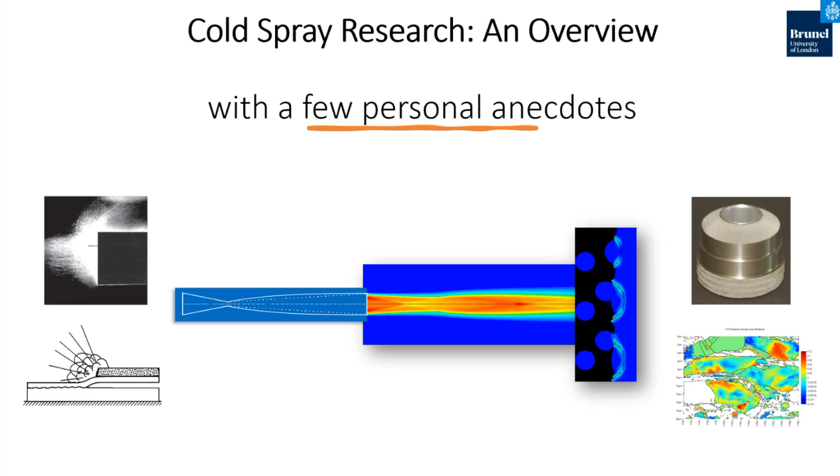Thank you very much, Prakash, for inviting me. And it's a pleasure to share my experience of working on cold spray for now 25 years. So I'm going to also point out that this is the work of not only myself, but a large group of contributors, especially those with whom I worked at Helmut Schmidt University in Germany.

So I'm not going through the entire list of contributors, but you see the names.

Cold spraying, for some of you, might be already a familiar topic, but for those of you who don't know anything about cold spray, this is basically a powder deposition method. Like any other thermal spraying method, you use powder and then you accelerate the powder particles and deposit them on a substrate to build coatings.

And that's used nowadays also for additive manufacturing. The main difference between conventional thermal processing or thermal spraying processes is that the particles of the powder remain in the solid state. So it's basically a solid state deposition process. Why? Because if you manage to decrease the processing temperature, you avoid oxidation and you avoid undesirable phase transformation. So that's the main motivation behind development of cold spray.

Interestingly, you can use cold spray to deposit refractory materials, including tantalum, with a very high melting point, which you would have trouble with if you wanted to use conventional thermal spraying methods.

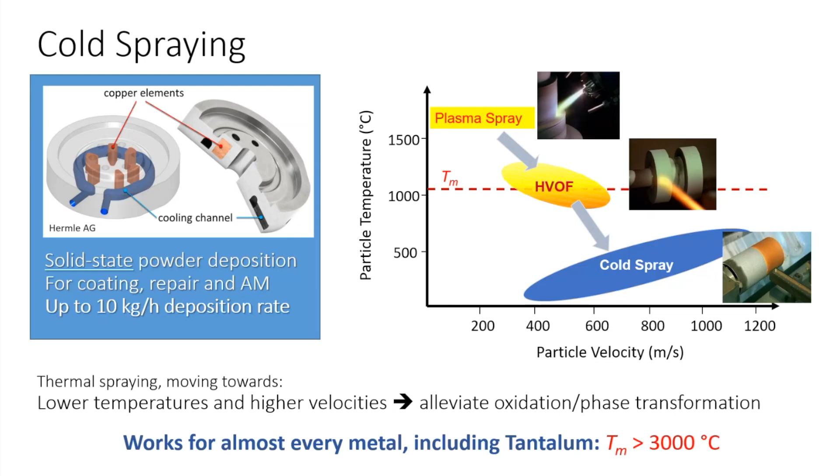So based on that, a main persistent question in cold spray research has always been: how does it work? So what's the mechanism behind that? I would say it's still maybe an open question. I would try to shed light on that a bit through the exposure to cold spray research. But I'm not going to give you probably the best answer to this question that we know so far.

So that's the answer. The cold spray mechanism is based on what you see here. I'm not going through all the details, but I can assure you that's one of the best and more balanced answers I've ever seen. The only problem is that it's been generated by AI, not me. I think I would not be able to provide an equally good answer.

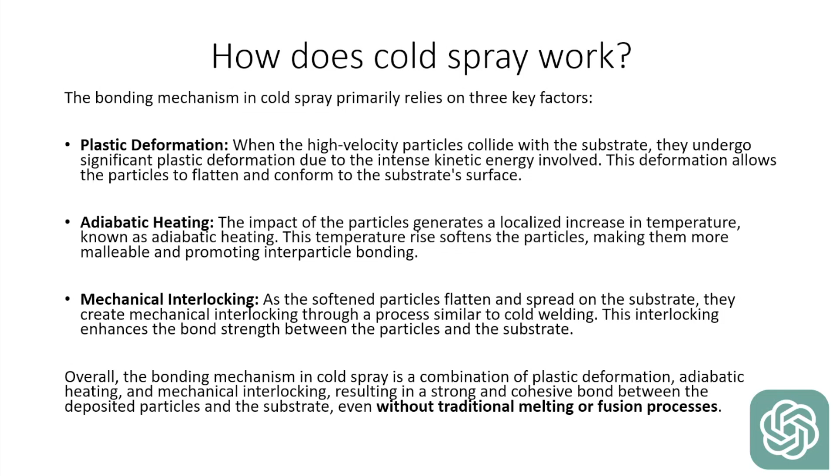You might say, well, this is maybe just a fancy way of Google search, or high advanced plagiarism. But I think it actually brings to mind, if this is so advanced that it could mimic human beings' answers, what is left for me to do as a researcher?

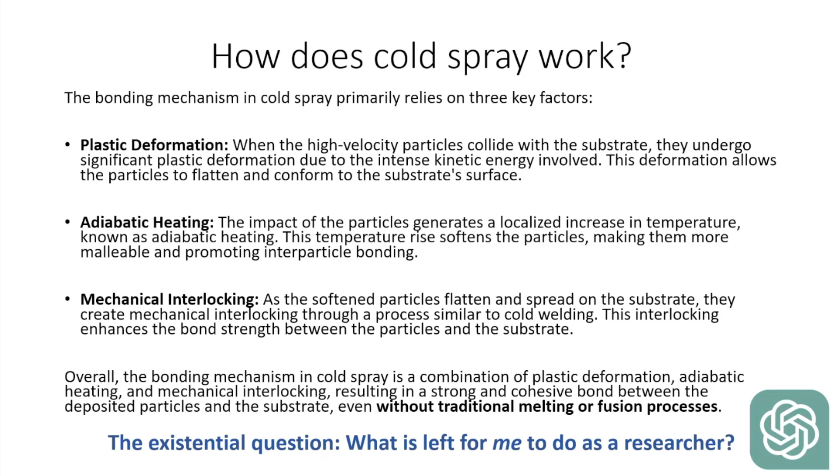So if you think that this is not a big threat, then I would tell you that it is probably just the tip of the iceberg. Just a few days ago, maybe you've heard that NVIDIA is investing $100 billion in OpenAI, and that's not even a major partner of OpenAI, so they probably have a lot more money.

I'll give you an estimate of what $100 billion means. It's the money that you can run the entire UK universities for one year, and be left with some money to run other universities and other places in Europe. So it's a huge amount of money. So it is really maybe a bit different from all other technological advancements that we have seen in the past. Maybe it isn't, but it definitely needs some repositioning of researchers, or as Dimitri just mentioned, maybe rebranding of ourselves.

So this talk, while I walk you through cold spray research that I was exposed to, is also meant as advice about what lessons we can learn from particular research activity, in this case cold spray, in order to reposition ourselves in the research community.

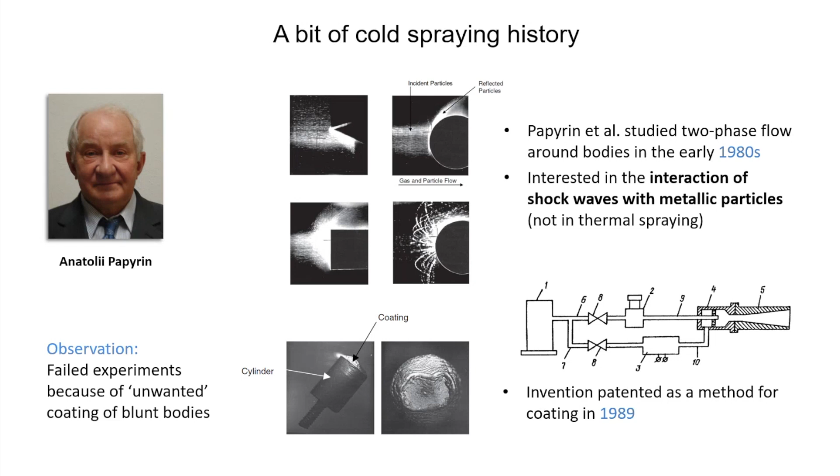From this, I would say the main lesson to be learned is that, of course, you should avoid failure. You shouldn't actually go for failure. But if failure does happen, then you should embrace it in the way that Papyrin did. So there is some value in not throwing away anything that you think is useless or rubbish.

Another part of the history relates to a meeting between Heinrich Kreye, a German physicist with an engineering mind, in the United States. He attends a presentation by Papyrin and realizes there are some interesting similarities between what he was interested in at the time, which was explosive cladding or explosive welding, and cold spray. So he took interest and was intrigued by that, and then invited Papyrin to his lab.

Papyrin started to actually develop a cold spray nozzle, you see here number C. So this is what Papyrin made in Kreye's lab. And then Kreye took it and brought it to a level that is now being commercialized, and companies are actually making things based on the design that was put together at Hamburg University.

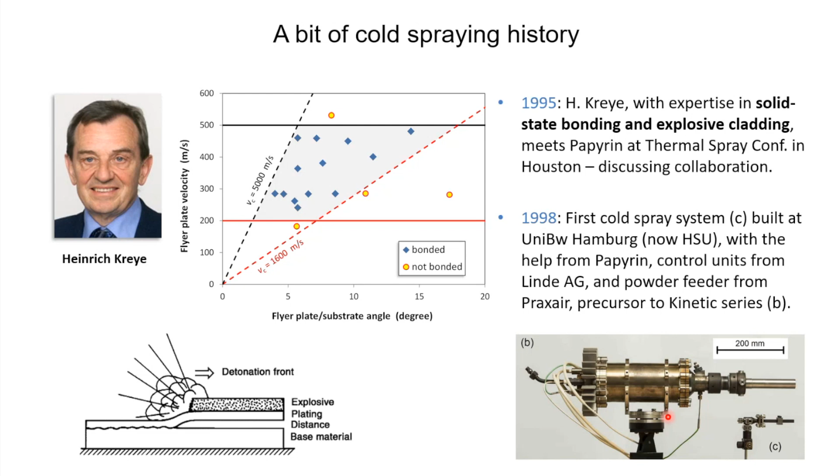So the lesson here for me was that it is more important sometimes in research to be interested in what other people are doing rather than to try to impress people by what you know. I would say in that sense AI needs a lot to do, because it always impresses us, but I don't know if it is impressed by anyone, although it actually gives you a lot of compliments sometimes when you ask anything.

This is a bit more personal. During my time in Cambridge between '93 and '96, I was working with Frank Gärtner. He was a postdoc, I was a PhD student. After that, during a reunion in 1999, Frank was giving a presentation about cold spray development in Hamburg, and nobody had heard anything about it at the time, or very few people. Then, because I was a solidification researcher, he thought it might be useful to have me over there for a short research stay, to look at cold spray from a solidification perspective.

Which later on became clear was not really helpful, in the sense that cold spray has, as we will see later, very little to do with solidification or melting.

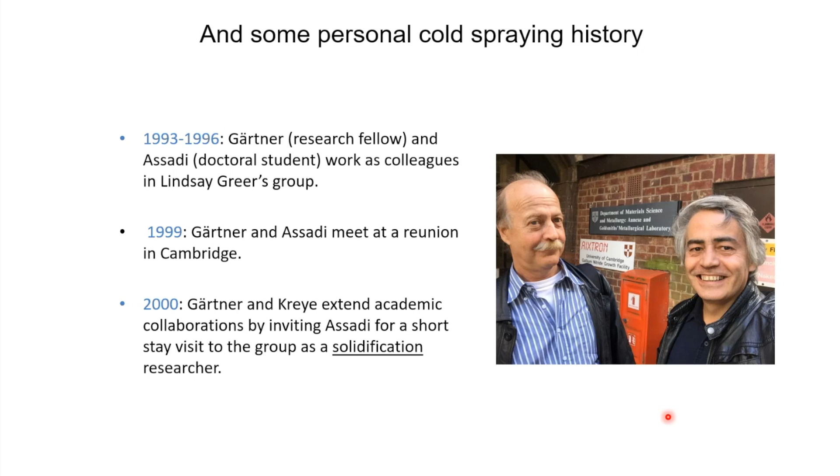So the lesson here: never miss a reunion. By that, I mean the human touch, the connection between friends, that's beyond research and academia. You just talk to friends and they talk about something at work, and then you take interest, and that becomes the beginning of a really fruitful collaboration.

So when I went to Helmut Schmidt University, at the time called Universität der Bundeswehr, the University of the Federal Armed Forces in Hamburg, Professor Kreye asked me, can you tell us anything about this characteristic velocity, which is called the critical velocity of bonding? That is the characteristic velocity that sets the boundary between no deposition, abrasion, and deposition, from a material science or solidification perspective. So that was the main question: what is this critical velocity related to?

And I think it still is. So my approach was to study explosive welding, which was probably the main motivation from Kreye's side to get interested in cold spraying - to see what is relevant here, what are the relevant microstructural phenomena. So we realized that in explosive welding, also you have a lot going on at the interface between two bonded bodies.

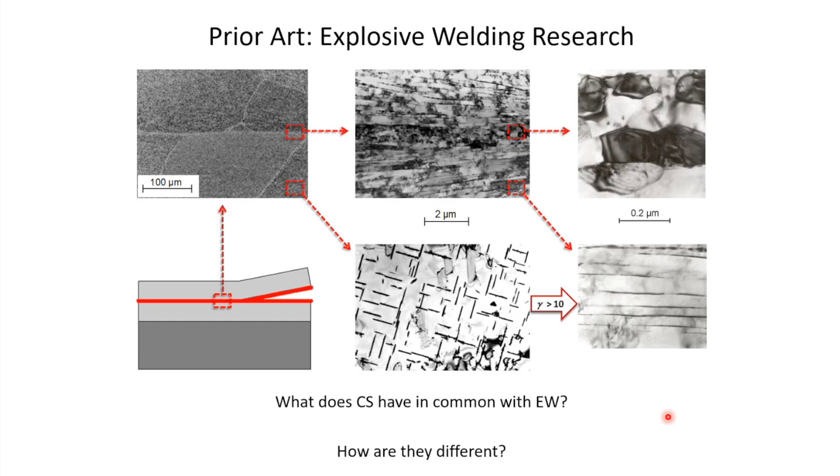Especially Kreye had done some work on the estimation of the interfacial strain using very interesting microscopy techniques, and he realized that there was a strain of 10 at the interface happening during explosive welding. So that brought us to the question: what is really similar? What are the similarities between cold spray and explosive welding, and how are they different? That was the main task, to formulate the main questions in cold spray research.

Now we looked at what is called the parameter selection map for explosive welding. We realized that it's a fairly complex map - it has 4 boundaries. The 2 boundaries at the side relate to the speed of sound in the material and what is called the speed of the collision point. Based on the relationship between these 2 speeds, you can estimate the quality of bonding, or tell whether or not you will get bonding.

But there was another boundary, and that was the more interesting one for me - the boundary between what is called the high velocity hydrodynamic deformation regime. That's what's happening in explosive welding, manifested by a jet of material flowing out of the interface, and the normal low velocity regime, which is like conventional classic deformation.

So the transition between the two is something that we thought might also be relevant for cold spray. But in cold spray, we have a problem because the angle between the substrate and the flying object is not constant, because normally you have a sphere. So a very subtle complexity coming from the geometrical considerations - that was the difference. With these in mind, we started the research.

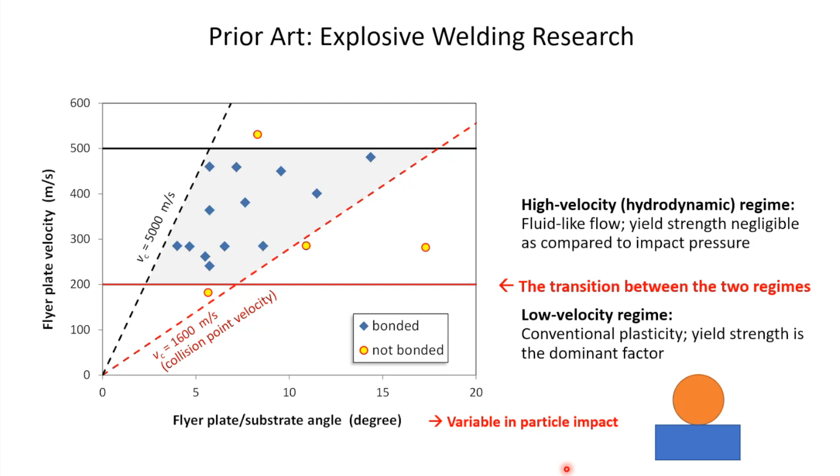So the next lesson would be that in research, probably in the future, especially with AI, you should focus more on formulating questions rather than finding answers, because answers are nowadays available.

Then, as a material scientist, the first thing I did was look at the correlation between this particular material property, critical velocity of bonding, and other material properties. You would think that melting temperature is probably the most relevant here, which is fairly true. So I plotted this critical velocity as a function of melting temperature - here there is some correlation.

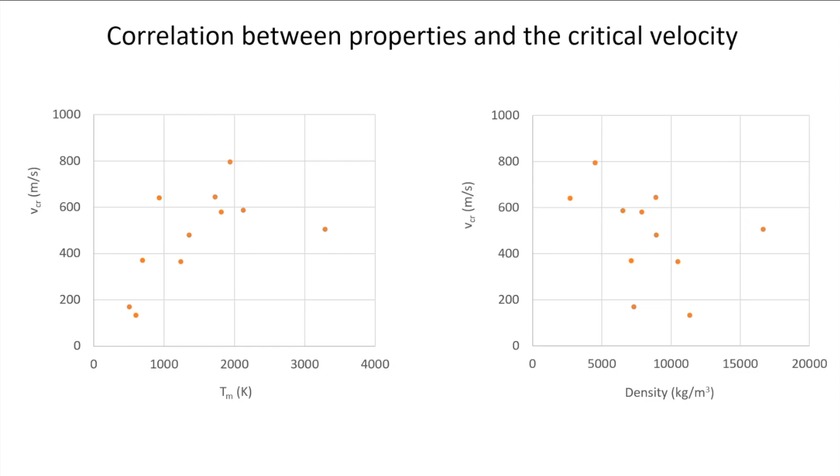But you might also think that because we're talking about kinetic energy, probably density should also play a role. So we did that, and if you push it too hard, you can say there is a correlation. But I would say this doesn't tell much, because correlations can be misleading.

So what we learn is that correlation is not exactly causation. That's a problem you might come across in many different fields of research. And I don't know how well AI is currently doing in identifying that glitch.

So I didn't give up on this correlation study. I tried to come up with a kind of combined material property and plot critical velocity as a function of that. This combined material property is obtained from an energy balance, assuming that if you hit the particle on a rigid surface and then you resolve it in melting, how would the kinetic energy correlate with the thermal properties? And I ended up with this.

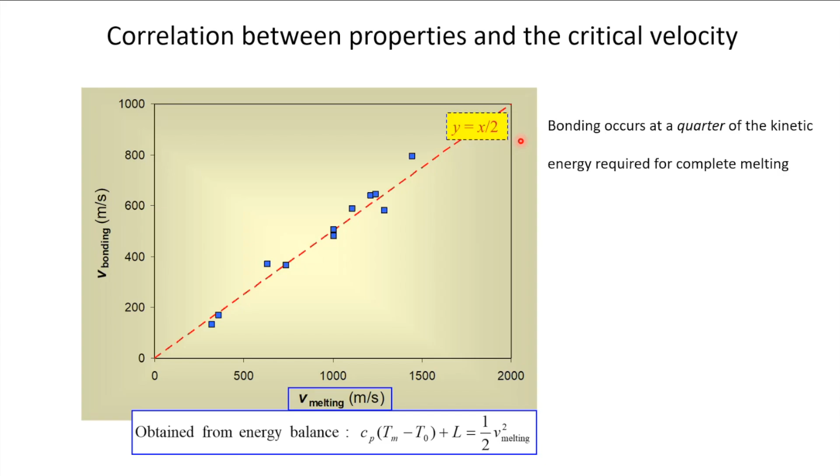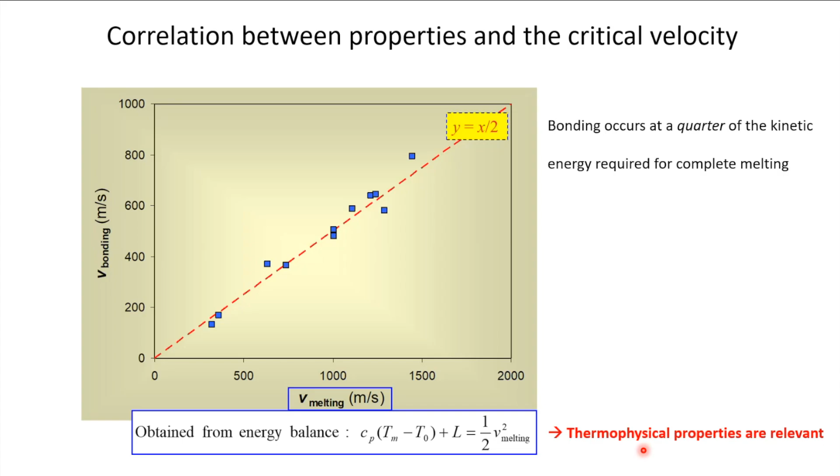You see that you will need half of the velocity, or a quarter of the kinetic energy that you would require for complete melting, in order to have bonding. Still, it doesn't tell you anything about the mechanism, because it could or could not involve melting, as it's a highly localized deformation process. But what it does tell you is that thermophysical properties are relevant - if you have particles at higher temperatures, they would probably bond better because of this correlation.

So based on that, you can perceive cold spray as an extension of the thermal spray process towards the lower thermal energy regime. And you can actually build up a plot like this that tells you where you should expect deposition based on the kinetic energy and the thermal energy.

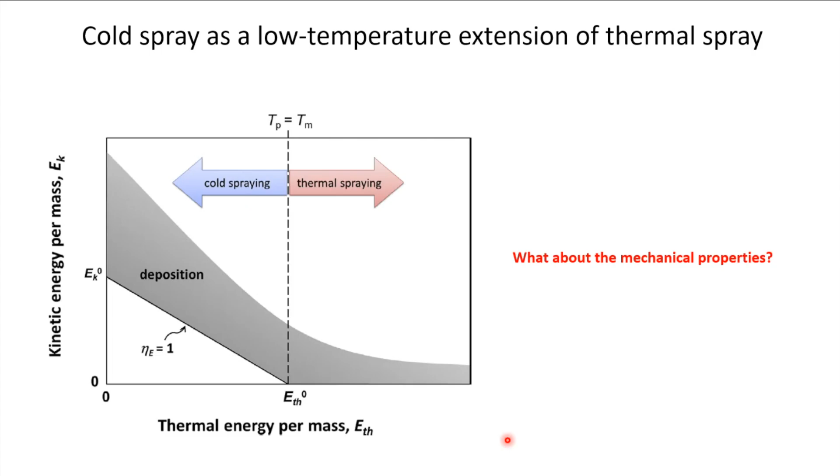But the main problem is, what about the mechanical properties? If your particles are harder, what happens then? Because the experience was that harder particles have a bigger problem in order to stick to the substrate.

So that actually drove me into using finite elements. We used finite element simulation in order to study the interface of two impinging bodies. Looking at the interface, we realized that in some regions, you have localized deformation during a very short period of time.

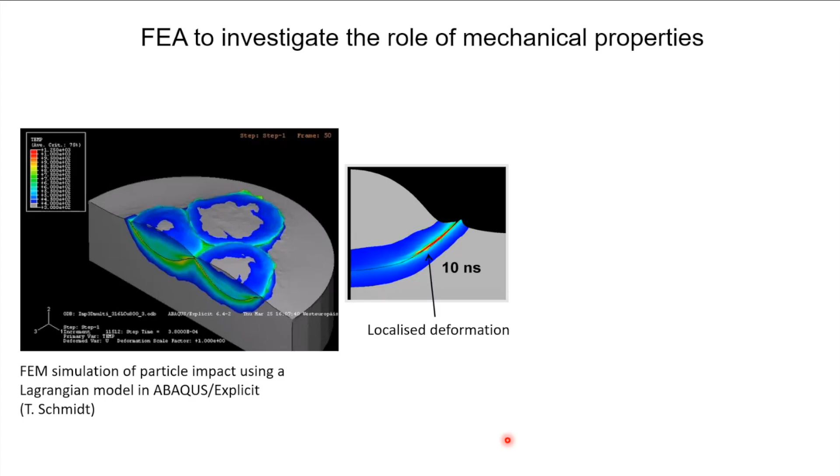What was a breakthrough then was looking at single impact experiments, so single particle impact experiments, what they call wipe tests. You could see that at the rim of the craters, there were some signs of bonding because there were residues of the impacting particles on the substrate.

And later on, that was shown for other materials, here for titanium, that apparently the bonding does occur from the rim and then it propagates towards the south pole of the particle. So apparently there was some message here that, based on this mechanical analysis, you could say this localized deformation has some role in bonding.

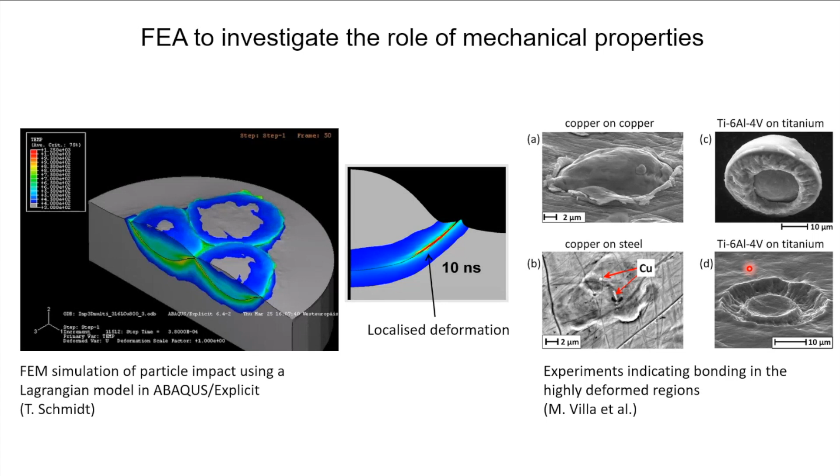And later on, we realized that this localized deformation is a very well-known phenomenon, but not in bonding, rather in fracture. For materials that have this kind of capability to show localized deformation, normally this leads into instability in the deformation and you lead to rupture. But in this case, we thought that it could be one of the factors playing a role in bonding.

This is called, in general, shear instability. But as I said, shear instability normally is something that you get during tension and it leads to rupture.

But everything that we said is telling you where you should expect or how you should expect bonding, but it doesn't tell you anything about the mechanism of bonding. So on the mechanism, the common notion so far is that because metallic particles form a thin layer of oxide on the surface, and that will not allow perfect bonding.

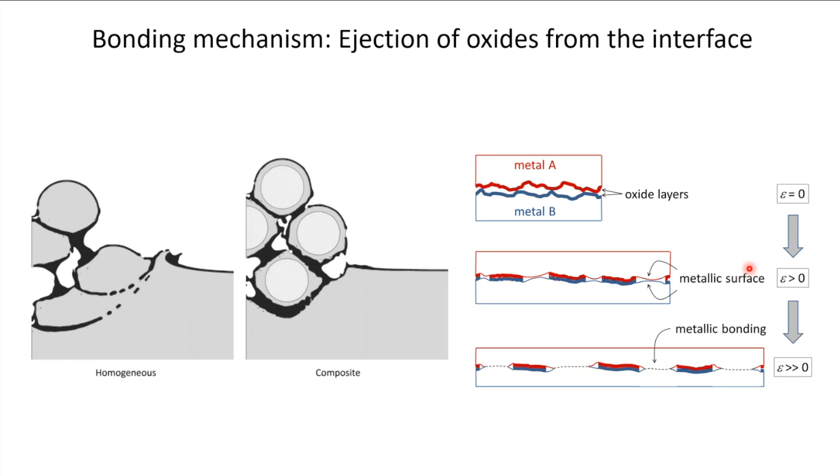So the main role of interfacial deformation is to get rid of those oxides, either by ejecting them from the interface or making some spaces between the oxides by rupturing them. So that's probably the main mechanism for metals, but for other materials, I think it's still under development, and we don't know exactly how it works, for instance, ceramics.

So the lesson here was to differentiate between what is called a mechanism and what is regarded as a criterion. This shear instability should probably be regarded as a criterion more than a mechanism.

Now, proceeding with the finite element simulation, we could then investigate the effect of various other parameters like the size of the particle. Doing some finite element simulation with heat transfer, we realized that larger particles are more prone to bonding, so you can get them bonded to the substrate at a lower impact velocity, because the time of extraction of the heat with respect to the size of the particles becomes more prominent.

So it's a bit of mathematical complexity here, but I think this has to do with the heat transfer equation and with the wave propagation equation, so that the way they're formulated will give you that.

The interesting point about this was that it could actually be verified by performing some large particle impact tests, whether or not... particles anymore, they were bullets. Because of having the facility at the University of the Federal Armed Forces, people could use real guns in order to shoot big bullets of copper onto any substrate and see how they behave.

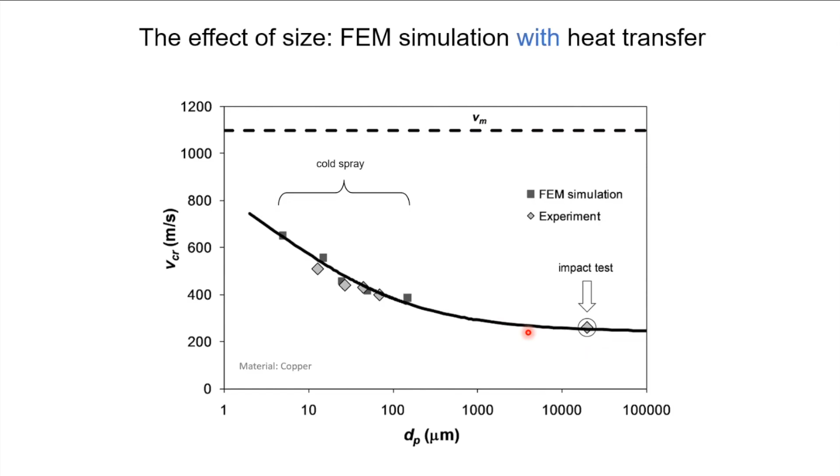So this trend was also experimentally verified at a large range of particle sizes. Now, if you take out the heat transfer, you will see that it doesn't really matter how large your particle is. That's a bit counterintuitive, because you think the larger particles carry a lot of kinetic energy at the same velocity, so they should provide a lot of energy for bonding, but apparently it's not the case.

So this is one example of an analysis using finite element for two cases where you have a 50 micron particle and a 50 millimeter particle at the same velocity impacting the substrate. You see absolutely no difference if you have no heat transfer. There's another factor we took out, and that was strain rate sensitivity. So if you take that out, it doesn't matter if the particle is 50 micron or 50 millimeters across.

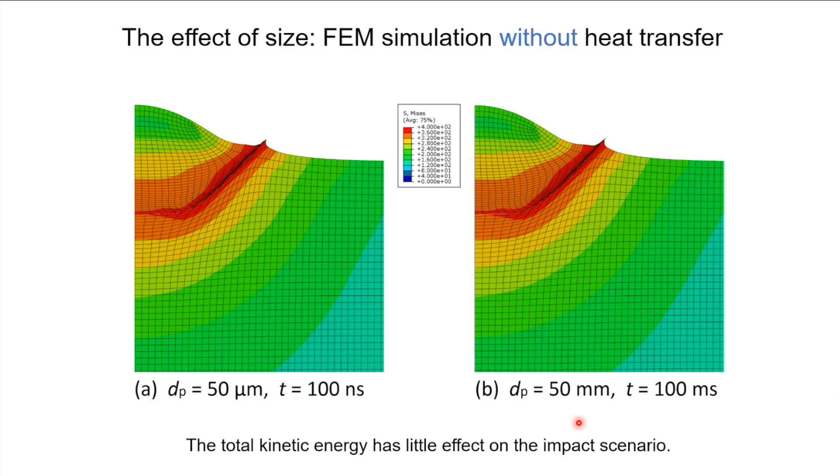So what does it tell us? It's telling us that intuition is not knowledge. So if you think kinetic energy is responsible, or this is the main factor, some analysis will show you that's not the case.

Now, because mechanical properties are important, the first thing you need to know about the particle, apart from the thermophysical properties, is the mechanical property. But how can you extract something like UTS from a tiny micron-sized particle? What we did at Helmut-Schmidt University was to use a nano-indenter, but modify it. So instead of indenting anything, we replaced the indenter with a flat head, and then we squeeze the particle, and then measure the load versus displacement in order to extract those constitutive properties.

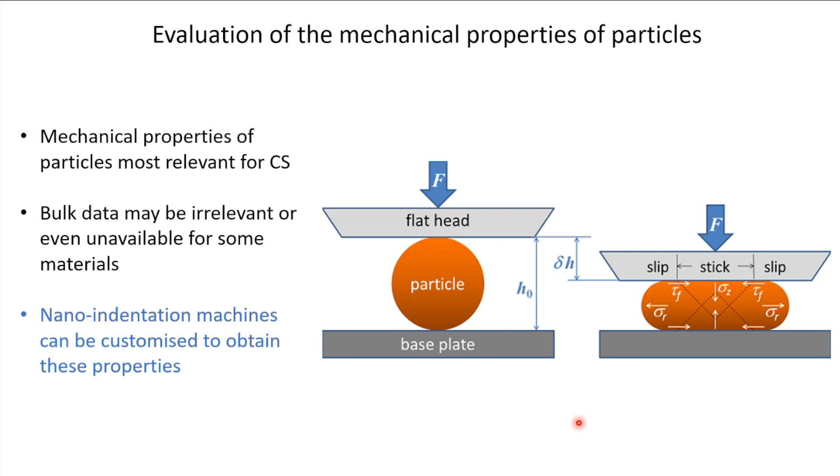Now, why did we do that? Because there is an intrinsic difference between the microstructure of particles and bulk material, because they are produced in a different way. The microstructure forms at a very high cooling rate normally if you use atomization. That's one thing. The other thing is that sometimes we don't even have the bulk data. For MCrAlY, for instance, they are normally produced not in bulk form, but in powder form. Because of that, we need to come up with a way of measuring these mechanical properties.

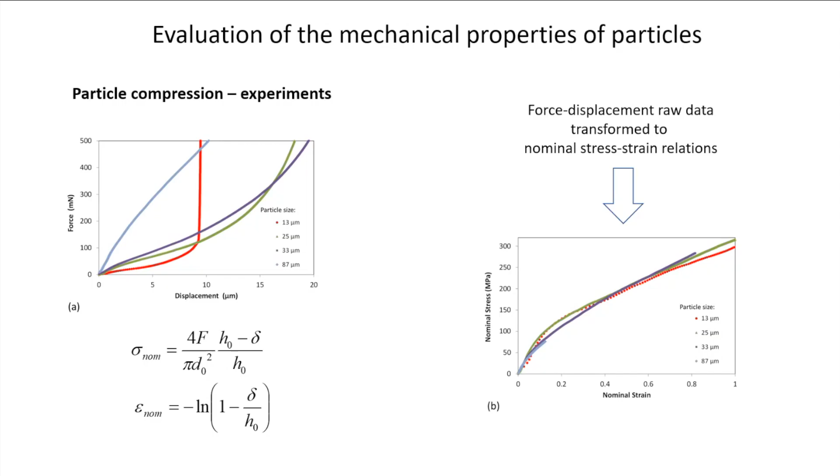Now, the problem here is still how to extract the constitutive properties. Again, finite element can be helpful, because for the particle under compression load, the elastic part can be handled analytically. Actually, the first person to look at that problem from an analytical point of view was Hertz, the same Hertz, Heinrich Hertz, who worked into electromagnetism. So when it gets to the plastic regime, then it becomes extremely complex. There is no analytical solution to the problem, so you need to use something like finite element or numerical simulation.

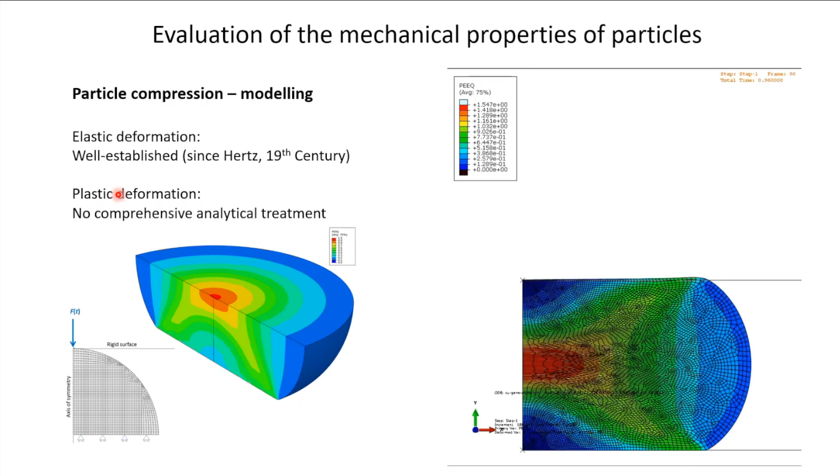So what you do is simulate that based on different input parameters, and then make a comparison by adjusting those parameters that you feed into your finite element analysis and the real experimental data. Then you can work out the constitutive parameters. In this case, I think it's quite an interesting example where you use this technique to work out the constitutive parameters of bulk metallic glasses.

That would be quite tricky if you wanted to do that during tensile testing, because of the shear bands - the same phenomenon. They are unstable in plastic deformation and break easily, so they show almost no ductility. But in compression it's different. Still, you cannot get the flow stress versus flow strain easily, because it's an unstable material under plastic deformation, unless you do something like this. This is something you wouldn't be able to see in any tensile testing, because as soon as you get a decrease of the flow stress with increase of strain, you end up with strain softening, and that's a recipe for rupture.

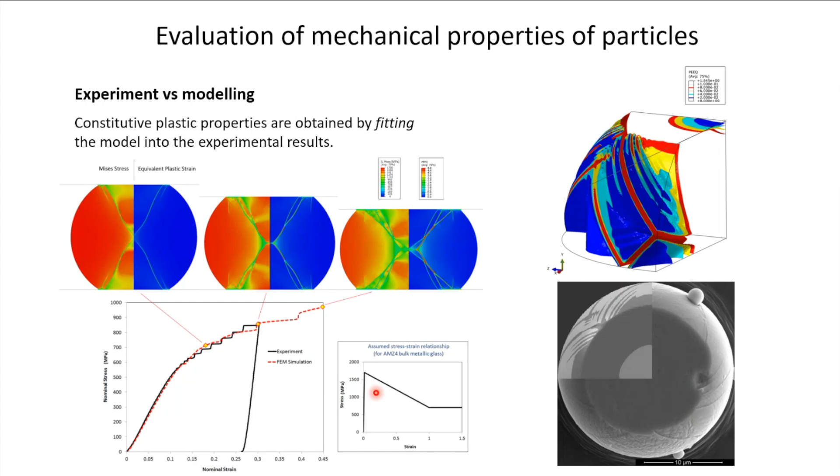So we used that for a lot of materials, including MCrAlY. We could work out, with good accuracy, the value of constitutive parameters and also main mechanical properties like UTS and yield strength for other materials as well.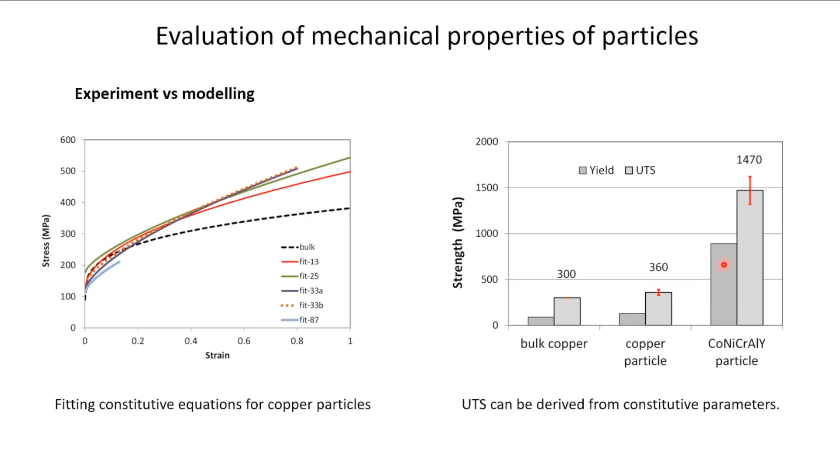So the lesson here was to repurpose. If you wanted to use nano-indentation, it would not give us the collective behavior of the particle under compression. It could actually give us something about local deformation. So you needed to look at this problem in a different way and use the nano-indenter differently. It was not nano-indentation anymore. The repurposing is something that probably AI needs to work on.

Now, with the practical application, you do a lot of experiments on different conditions of the strain, and you end up with a lot of correlations and parameters. This is a concise list of correlations and the factors that are relevant. If you want to find the sweet spot by performing experiments with all these factors as variables, you will not succeed, because for each variable you need to increment it within a range, and you'll end up performing millions of experiments.

So that's not feasible, that's also a practical problem. So how to deal with this? Some people might be quick to say, oh, we can use machine learning. Good luck with that too, because first of all, we don't have enough data to train your machine learning stuff with. And second, who is going to use that? Are you going to make a software tool and give it to someone with expertise in Python to run it every time? So how is that going to work?

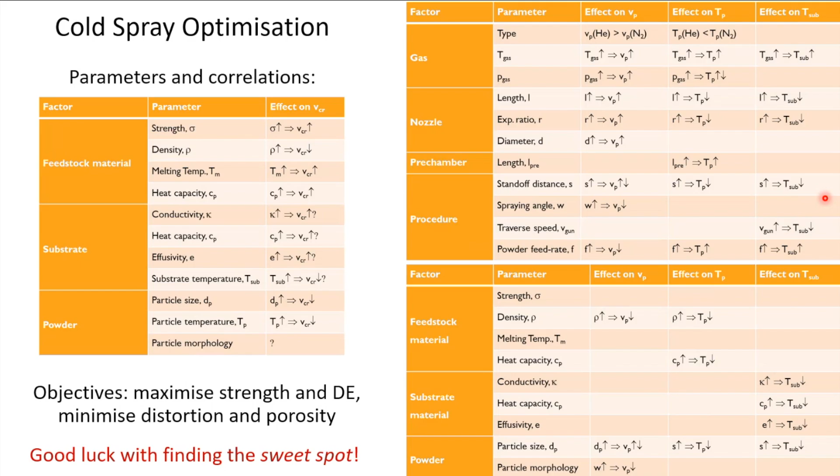So we thought about looking at this from a more physical point of view. We plotted deposition efficiency, which is how much gets deposited out of how much particle, versus various parameters, including particle size and particle velocity. So you have a multi-dimensional space, and you end up with a lot of scattered data points on any diagram you look at. However, if you simply divide the particle velocity by the critical velocity, you end up with a dimensionless parameter we call eta, and you realize that most of these scattered data points collapse onto one line or one curve. That was quite interesting, because instead of dealing with too many different variables, you could separate the effect of material properties from the process parameters and bring everything into one single parameter, called eta.

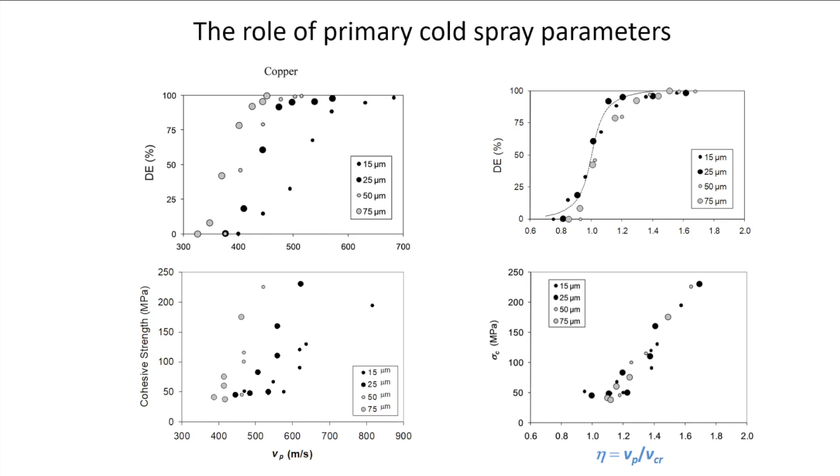I think eta is now being used for research, but probably not widely. I think it's a very good rule of thumb to see where you're at in the cold spray space. Basically, you have some process parameters and some material parameters, and these have effects on impact conditions, also on critical conditions, which is critical velocity. You can squeeze all of these into this eta, and based on that you can estimate or predict the outcome of the cold spray deposition, not only for different process parameters, but also for different particle sizes and even for different materials. This works, for instance, here in this case for titanium and copper — with the same eta value, you end up with the same normalized strength.

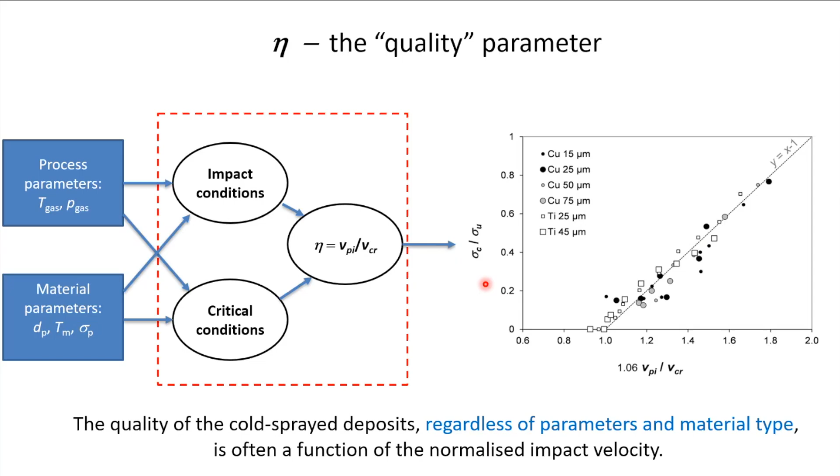Now, if I wanted to squeeze the entire cold spray research I was involved with into one slide, that would be it: eta should be taken as a measure of sprayability. Before, we thought critical velocity was the measure. So if we want to decide whether tantalum is easier to spray than magnesium, we look at the critical velocity — tantalum is less than, magnesium is more than 600 meters per second. So we say, oh, magnesium is more difficult, but that's not the case. When you say which one is easier, you should not only look at the material, but also at the setting, the process settings, or the equipment.

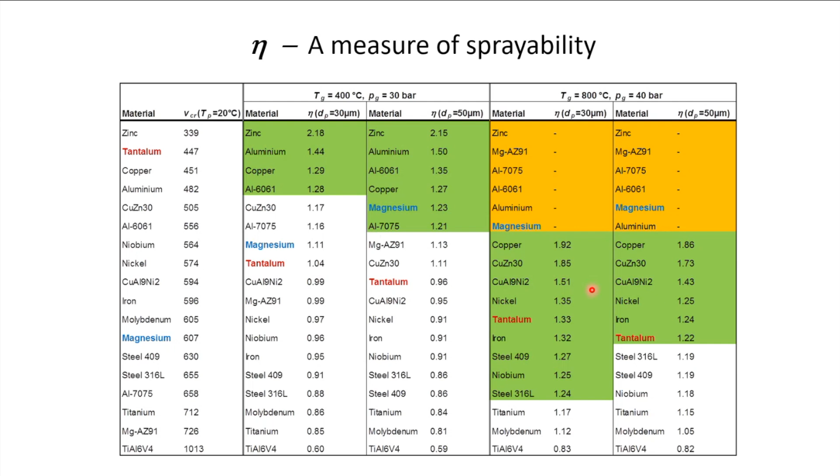If I want to give you a more tangible example, it's like this: you can't judge a person saying, oh, this is an easygoing person. I would ask, in what context? They might be a very easygoing person as a friend, but maybe not as a colleague, or the other way around. The same can be said about materials. So when you ask the question about tantalum and magnesium, which one is easier, I would first ask what is your equipment, what is your process gas pressure, and what is your temperature. Then I can tell you which one is easier. For instance, if you change the processing condition, the difference between magnesium and tantalum in terms of sprayability becomes more profound.

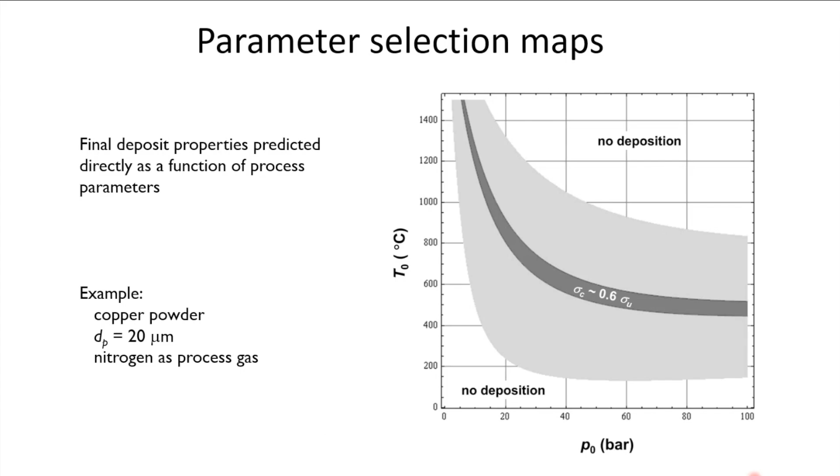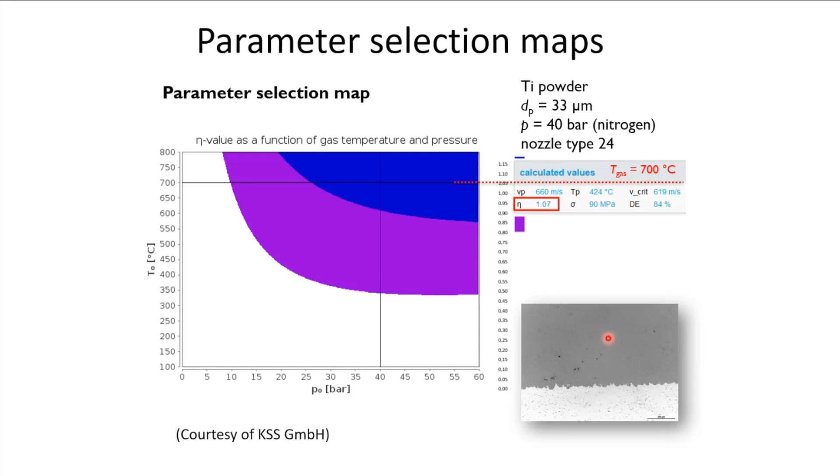Instead of just doing more and more experiments with different conditions, we're trying to consolidate all of this data into something that is more tangible and easier to use. So that's something I think AI needs to learn, to consolidate, not only to generate more and more data through experiments.

So the next and final part is about my recent work here at Brunel around something you can regard as a process between cold spray and explosive cladding, because in terms of the variation in geometry or impact angle, I think it's closer to cold spray, but in other aspects it's very close to explosive welding. Basically, instead of using explosive, we use electromagnetic acceleration. This is something called EMPT that we have at Brunel. We looked at this together with colleagues led by Zaidao Li, who's now at Stellium.

We realized that if you look at the bonded region, not only is the amount of plastic strain high, but also the value of the plastic strain on either counterpart is almost the same. That's what is normally regarded as conformal deformation. So beyond needing a high amount of deformation, you need conformal deformation. That's an additional criteria for bonding, at least as far as EMPT is concerned.

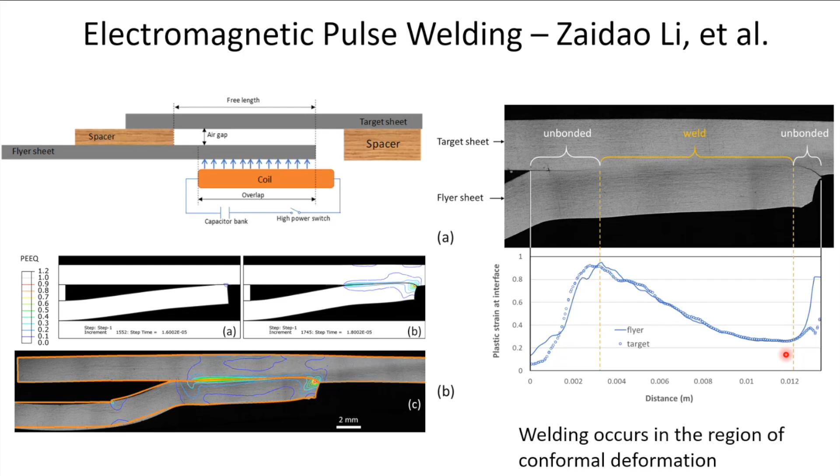But back to cold spray—very recently, colleagues in the United States came up with a very interesting and thorough investigation of the localized strength of the bonded interface for a micron-sized particle. It's amazing work because it uses very advanced high-resolution microscopy in addition to very well-controlled impact studies using this laser acceleration method.

The outcome was that not only do you get bonding or no bonding in different regions of the interface, but you can also very accurately work out the value of the bond strength in different regions. You see that at the South Pole, as expected, you get very weak bonding, whereas closer to the rim, you have higher strength bonding.

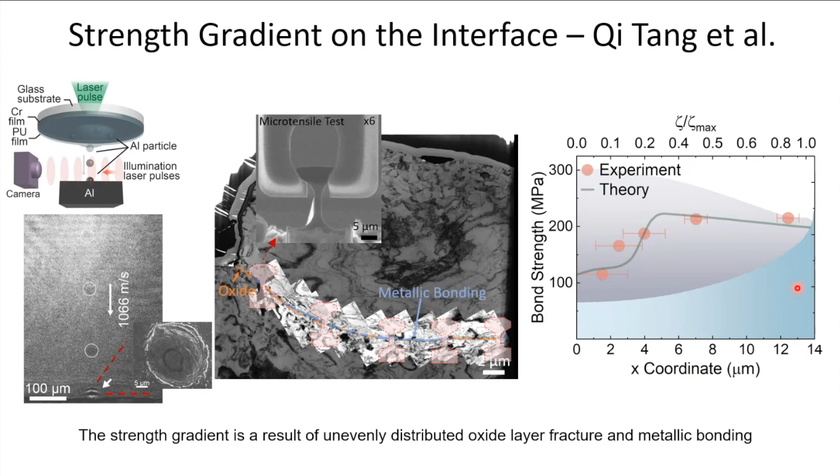But everything said so far was about bonding between similar materials. So what if they are dissimilar, where the substrate has a different property? Then my friend Frank Gärtner, being a material physicist and expert in thermodynamics, came up with this idea. He said, well, let's look at the enthalpy of mixing. And I said, what does enthalpy of mixing have to do with cold spray? There's no time for any chemical reaction, but apparently it does play a role.

If you take different combinations of particle and substrate material pairs, you see that for those materials with a positive enthalpy of mixing—where mixing is more difficult—bonding is also more difficult to achieve. So apparently there is some effect from chemistry which hasn't been explored yet. Frank and I always talk about a project looking into this, which I hope will happen in the future.

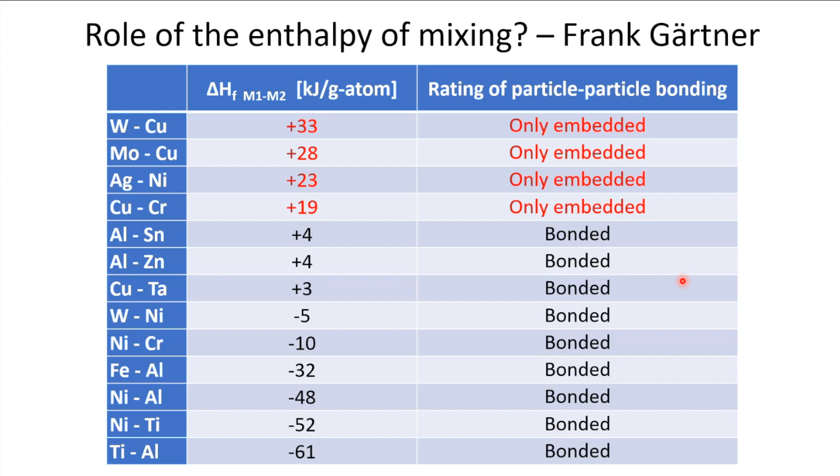So the final lesson is that sometimes you need to defocus and then refocus. If you just look at the same tools available at your disposal and try to use them over and over again, you will never be able to look at other possibilities—in this case, like what would be the role of chemical composition, etc. So that refocusing is something that probably AI is not doing.

Based on that, I would finish with the summary of these lessons. As researchers, I think in order to reposition ourselves and compete with AI, first we need to accept it, we need to embrace it, we need to make the best use of it. At the same time, we need to position ourselves—at least that's my own experience in cold spray—in order to justify our worth as researchers. Thanks very much.

Mosde asking a question: Eta is a dimensionless parameter, but is conceptually related to speed and does not depend on particle size or material properties. So how can it serve as a criteria for bonding? Also, is the critical velocity a well-defined parameter? I guess you said it is challenging to determine accurately.